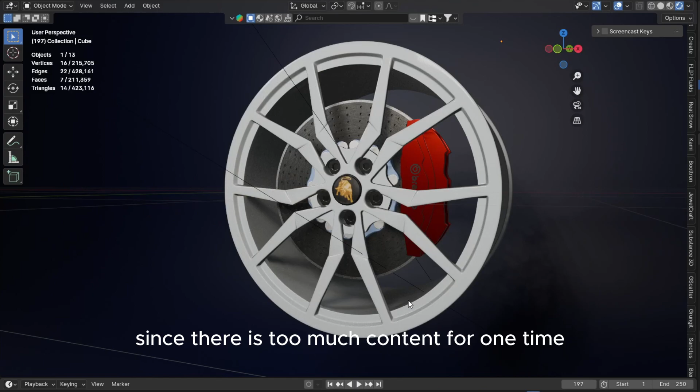As promised, here is the second part of the training on modeling a Lamborghini Huracan. In this part, we will have a wheel, but without rubber. That will be the next part, since there is too much content for one time. I hope you understand. So let's get started.

Let's start by deleting everything, then look for a reference, placing the view at an angle of 90 degrees by pressing 1 on the numpad. Add our image. It's important to place the reference as centered as possible, and at an angle of 90 degrees, since the final result depends on this.

So we add a circle mesh and set it in the settings to 100 vertices. Now we can rotate it 90 degrees, place it opposite the reference, and delete vertices, leaving 11 pieces from which we will start modeling.

We turn on modeling relative to the 3D cursor. We place our workpiece opposite the disc, and with simple movements we begin to create the shape of the disc.

Another thing I'd like to share is that you don't need to simply repeat what you see on the screen. I'll try to explain how it works, and then it will become clear why you need to do such manipulations with our model.

So what do we have? As everyone knows, there are 360 degrees in a circle. Our machine disc has 10 spokes that go in a circle. We take this as a basis and count. If you take these 100 vertices and divide them into 5 pairs of spokes, you get 20 vertices per pair.

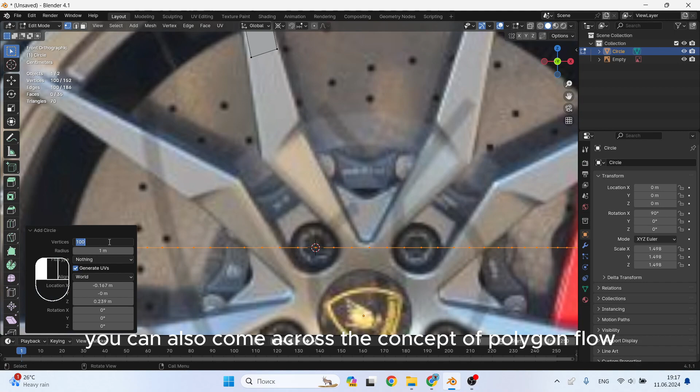You may also come across the concept of polygon flow, but the arrangement of vertices and edges of the mesh also plays an important role in creating 3D models.

There are no clear standards or iron rules in working with topology. This is an area where success can only be achieved through practice, analysis, experience, and being well read. In some ways, topology can be compared to learning a foreign language. You can come to another country without knowing its language, but you will definitely encounter problems and difficulties, and won't get the result from the trip that you could have if you knew the local language at least at a basic level.

What is the importance of topology? Basically, it depends on the task facing the artist. In hard surface modeling, good topology allows us to make edits and change the geometry of the model easier and faster, select individual areas, work with clean and neat chamfers, and get a clean final result.

In modeling characters or creatures, the mesh will deform during animation, so correct topology is important for clean animation. It makes the animator's life easier and allows easy, quick work on edits and changes to the model mesh. The cleaner and more correct the topology, the easier it is to control and predict the final result, avoid unpleasant artifacts, and save time by eliminating useless actions from the workflow.

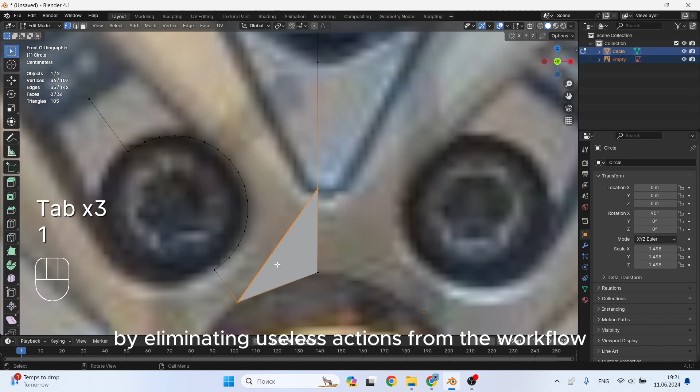What does a 3D model consist of? Any model consists of 3 elements: a polygon, an edge, a vertex. You will often hear these designations: vertex, edge, polygon.

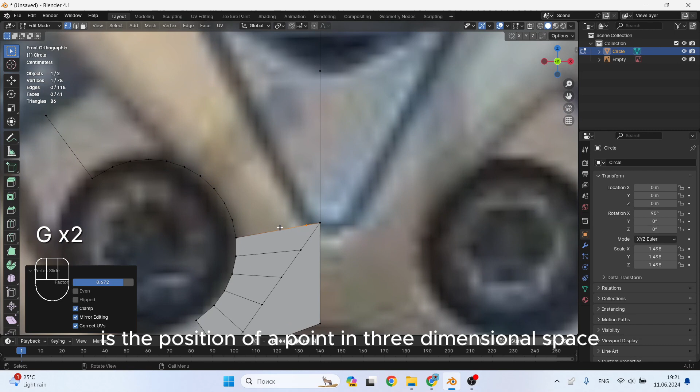A vertex is the position of a point in 3-dimensional space, determined by the coordinates x, y, z.

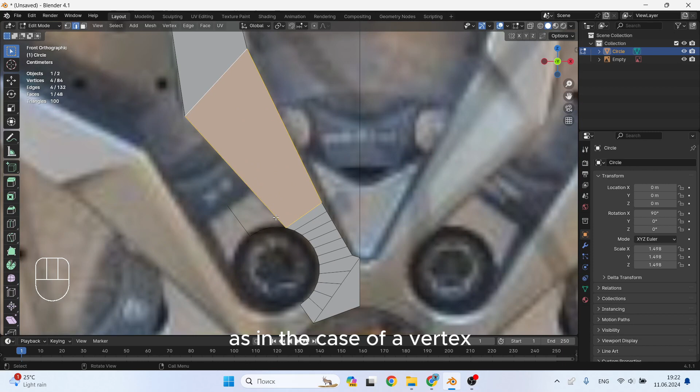It can store such information as color, normal direction, texture coordinates. Several edges and polygons can have one vertex. Edge is a line that connects two vertices. As in the case of a vertex, several polygons can have a common edge. It is important not to call them lines, and instead get used to the concept of edge.

Polygon: a polygon consists of three or more vertices with a closed contour of edges. This is exactly the shape that defines the surface of a three-dimensional mesh. Polygon flow, remember this concept. A polygon is also called a face, or a surface. Usually a 3D mesh contains from tens to hundreds and thousands of polygons.

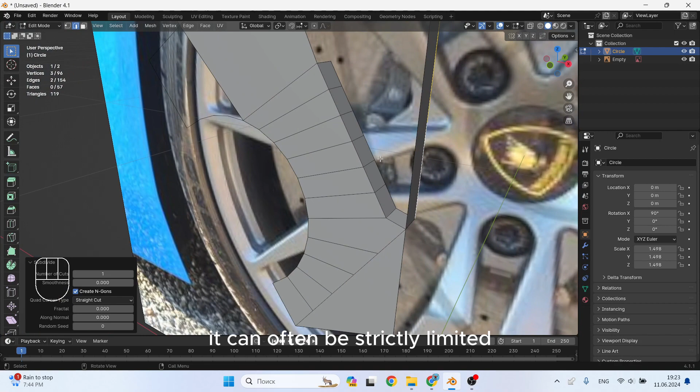It depends on the task for which we make our model. The well-known concept of optimization also includes the number of polygons, or more precisely triangles, included in the mesh. It can often be strictly limited by the requirements of the project, in the case of games. Every year these requirements become more and more blurred, thanks to the development of computing technologies. But this is not the only aspect of optimization.

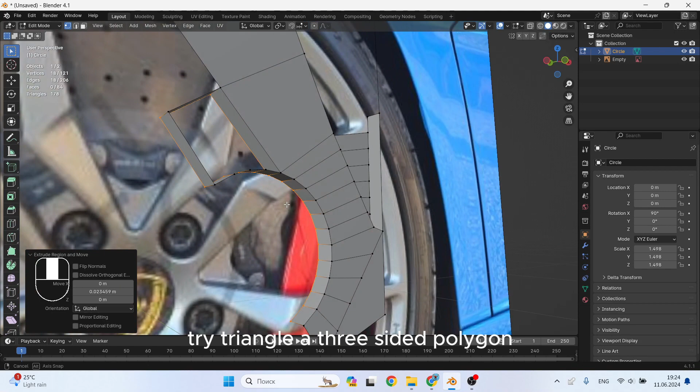Polygons are named based on their number of sides. Let's highlight three types that you will encounter most often. Triangle: a three-sided polygon. You will encounter this concept very often, since a triangle is the basic form of a polygon used, for example, by engines.

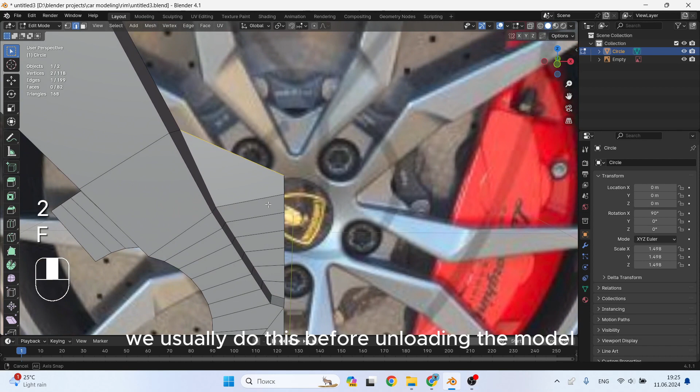There is also a triangulation process, dividing the quads of a model into triangles. We usually do this before unloading the model for baking. The engines, in turn, do the triangulation themselves if it is not done in advance.

Quadrangle, or quad: a polygon with four sides. This is the type of polygon that we should know, love and respect, since it is the basis of our model when creating its mesh.

N-gon: a polygon with more than four sides. Important: if you see a quad with 5 vertices, then this is already an n-gon, despite the fact that visually it is square. There are a number of opinions in the 3D community on the topic of using n-gon and triangle polygons in creating a model.

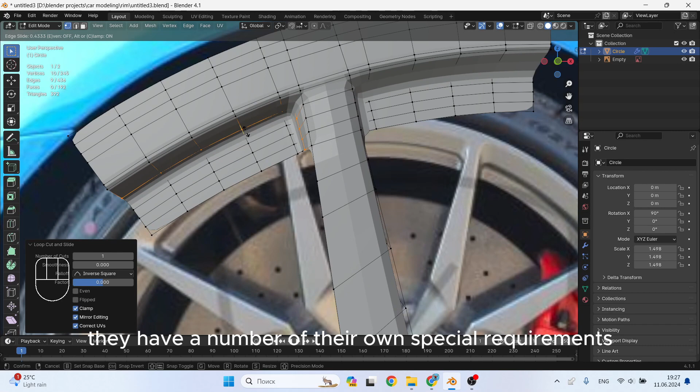In fact, everything depends on the situation and the goals for which the model is created. A separate topic is models for animation, for example characters. They have a number of their own special requirements for the use of polygons in topology. Let's take the following principle as a basis: what I can do does not mean that it should be so.

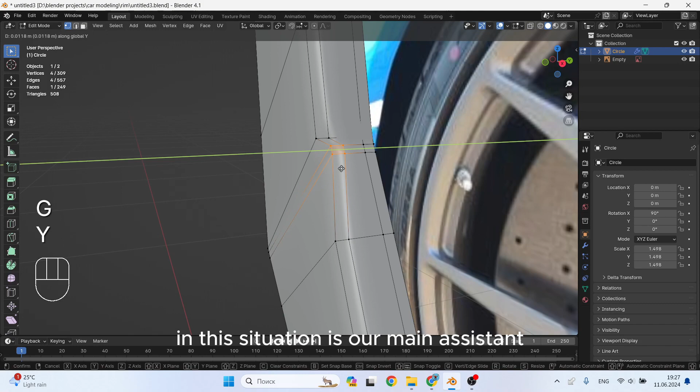We will strive to build our grids on quad, square polygons. Let's remember that an even and convenient grid is the key to ease and speed of editing. A square polygon in this situation is our main assistant. Of course there are situations when other types of polygons are used, but this is situational. It becomes clearer with experience, and on specific examples you will need to look and decide which polygon to use.

Planar and non-planar polygons, flat and non-planar. A polygon is planar if all its vertices lie in the same plane. Also, a triangular polygon is planar, since its 3 vertices will always lie in the same plane. Most polygons in your models will be planar, lying with their vertices in the same plane.

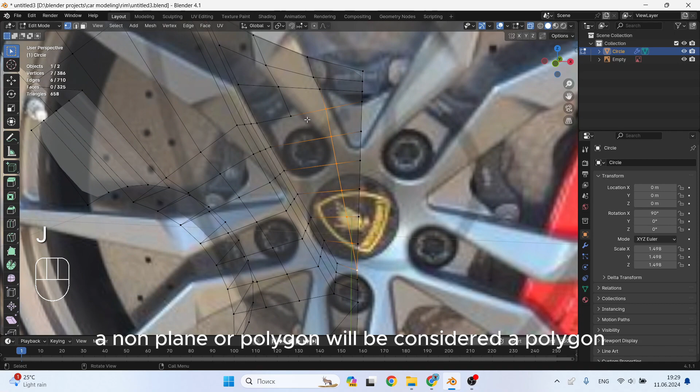In turn, a non-planar polygon is a polygon in which one or more vertices do not lie in the plane with the others, creating a bend.

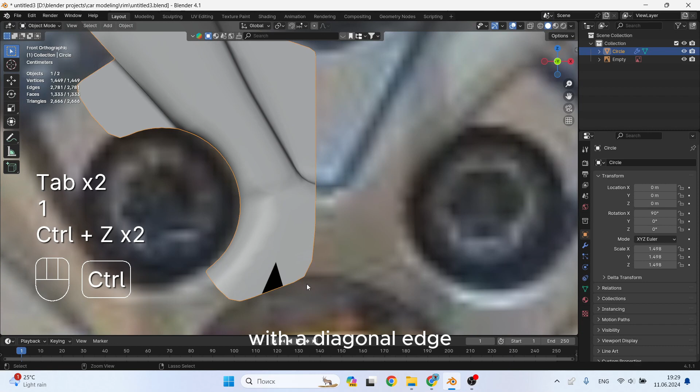When working with topology, it is worth remembering that there is a process of triangulation of models. We talked about it above. In essence, this is dividing your quads into triangles with a diagonal edge. Any engine requires that the model be triangulated for its correct display, or does it itself.

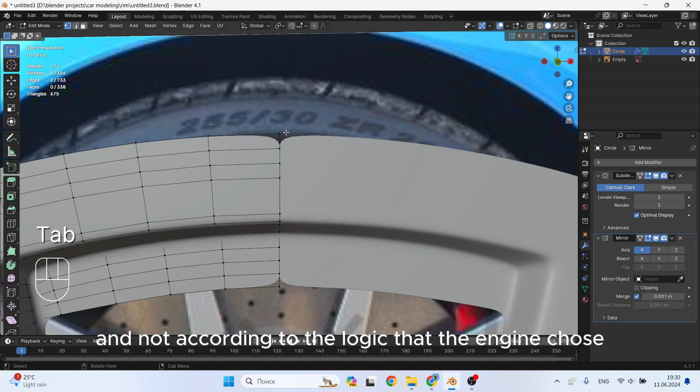In the case of non-planar polygons, this can create artifacts on the surface of the model, since triangulation on such polygons can lie arbitrarily, without taking into account their deformation axis. This is solved by manually editing the triangulation. It should go along the deformation axis of the polygon that you initially laid down when deforming it, and not according to the logic that the engine chose.

Subdivision surface is a surface subdivision algorithm that creates a smooth surface from a rough, polygonal mesh. When the mesh is subdivided, it becomes smoother, and its details take on a more final appearance. This transformation is reversible only if you do not apply final smoothing, for example before unloading high poly for baking.

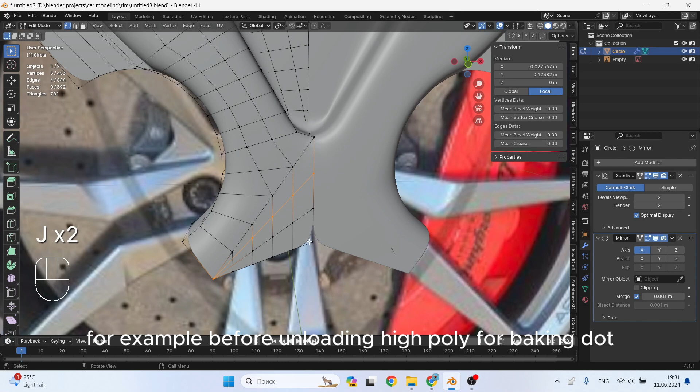The most commonly used subdivision surface algorithm is Catmull-Clark, or CC SubD. It was developed by Edwin Catmull and James Clark in 1978.

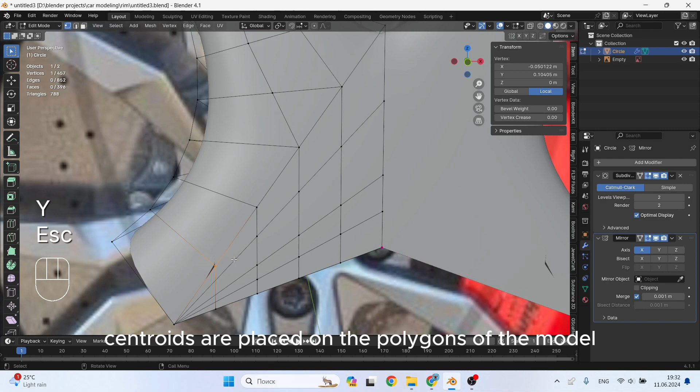Note how long ago a successful idea became a relevant tool to this day. In simple terms, its essence is that centroids are placed on the polygons of the model under sub D, vertices at the center points of the polygons. Then they are connected by edges, the remaining vertices are shifted to relieve stress, the shape is rounded.

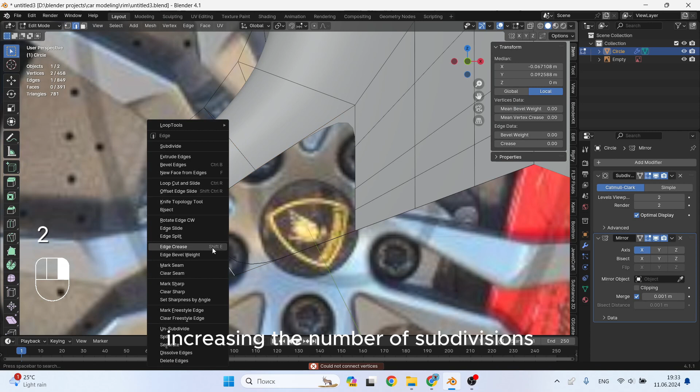This algorithm is iterative, that is, it can be repeated over and over, increasing the number of subdivisions. Thus, we get a high poly model, and it is this process that we need to take into account when building a model for sub D.

Clean and neat work with topology under subdivision surface is a guarantee that you will get the correct model without artifacts at the output: high density, chaos in the construction of the grid, inconsistency in polygons. All this can create a lot of difficulties for you in the modeling process and turn it into hard, exhausting work. But we want to enjoy the process and be creative, not rake up a pile of polygons, right?

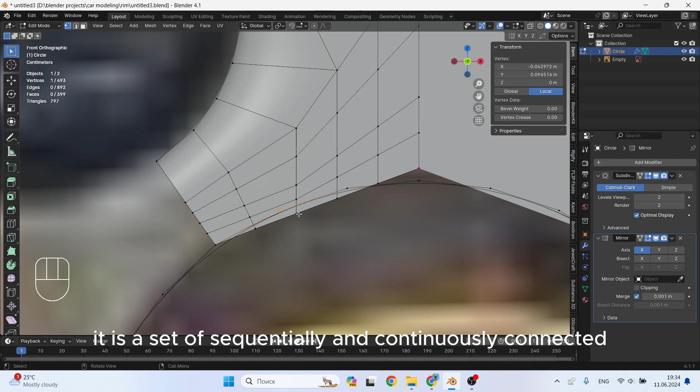Important definitions and concepts of topology that you need to know and take into account. Polyloop, a loop of polygons, is a set of sequentially and continuously connected square polygons.

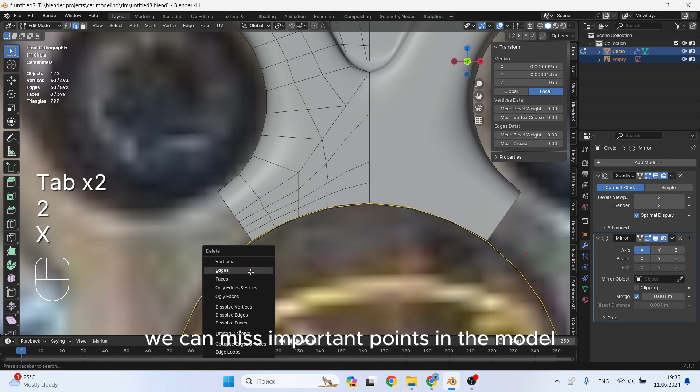Polyloop is an important element in building a 3D model. The ability to work with loops will be the key to your success. One polygon by itself means nothing, since thinking in this format we do not see codependencies, we can miss important points in the model, or make construction errors.

But a closed chain of polygons is a powerful tool that allows you to think and model more comprehensively. You should immediately, from the very beginning, try to think in loops, not separate polygons when creating your grids. Polyloop allows you to distribute polygons more accurately and evenly, select individual sections and edit the model.

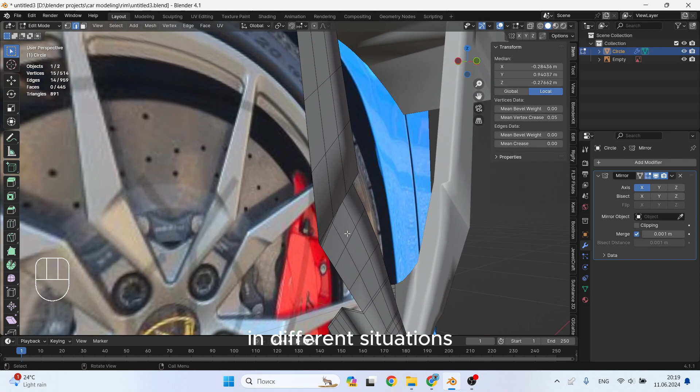When using sub D, correct polyloops are subdivided and smoothed best of all. This is why you should immediately, in advance, plan your work and try to think comprehensively. The right start to work is a guarantee that at the final stages you will save yourself a lot of time and effort. In different situations, polyloops work differently with sub D, which is why you need practice and experience to see and remember different situations.

Look at different examples of meshes, try to see these loops, and soon you will understand that indeed, each model consists primarily of them. Edge loop, in turn, is a loop of edges.

As with polyloop, an edge loop is a cut that you will make on the model, and they will close. Correct work with the placement of such loops is also the key to a clean, light mesh that will be correctly smoothed and easy to edit.

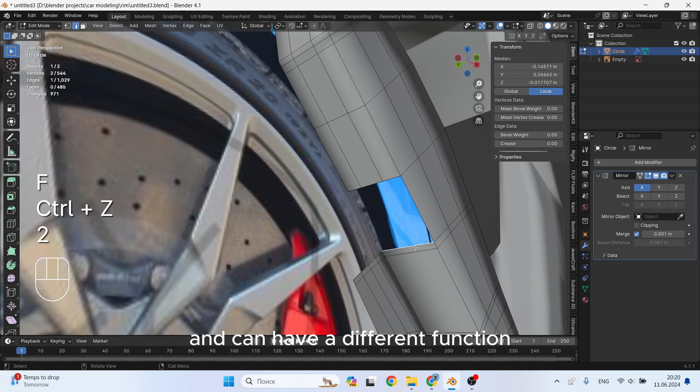Pay attention to the image above, it shows both polygon loops and edge loops. In fact, these are inseparable concepts, but each of them is important in itself and can have a different function depending on the task. There are also situations when the edge loop ends in a star, they are also called poles. We will talk about this further.

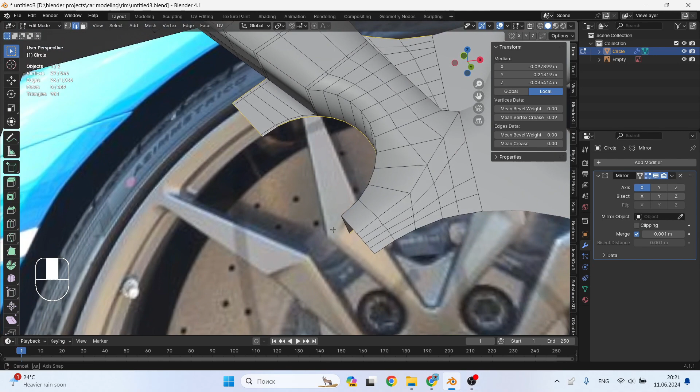Each edge loop is designed to serve the shape of your object. Look at the position of the loops in your model and tell yourself which of them serve a function and which do not. This will show you where you have done unnecessary work. When working with edge loop, it is also worth thinking in loops, not individual edges.

Well, at this point we can consider that our part is ready, so we need to start reproducing it. It's not difficult, but for this we need to remember the geometry material for the 5th grade.

If we divide 360 degrees of a circle into 5 pairs of spokes, we will get 72 degrees occupied by one spoke. That is, we need to copy our part and rotate it relative to the 3D point by 72 degrees. And if you connect 2 parts, then in order to move them, you will need to rotate them by 144 degrees.

Well, and one more detail. When ready, you can connect them, and add the Weld modifier. As you can see, not everything is perfectly connected, so you need to fix it a little using the M button to merge them. To avoid this kind of problem, you need to create the first part ideally, so we strive for the ideal shape.

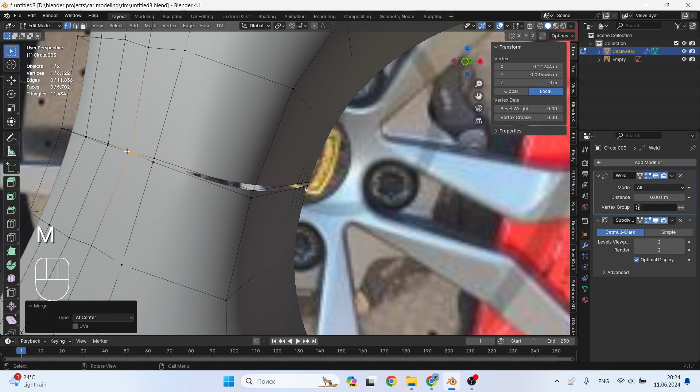At this point we need to select all and make it by distance merge. We need this to make correct geometry.

Also go to Loop Tools and apply Circle to these edges one by one.

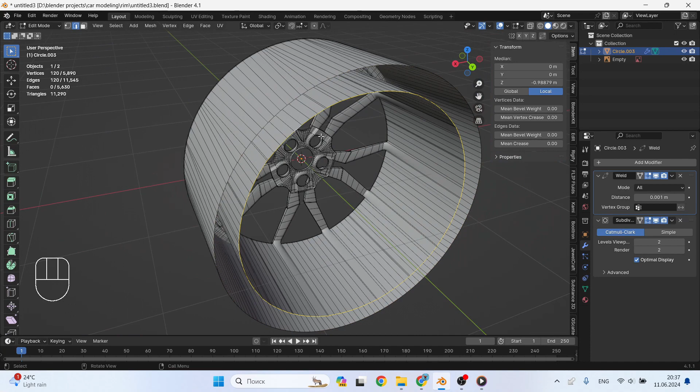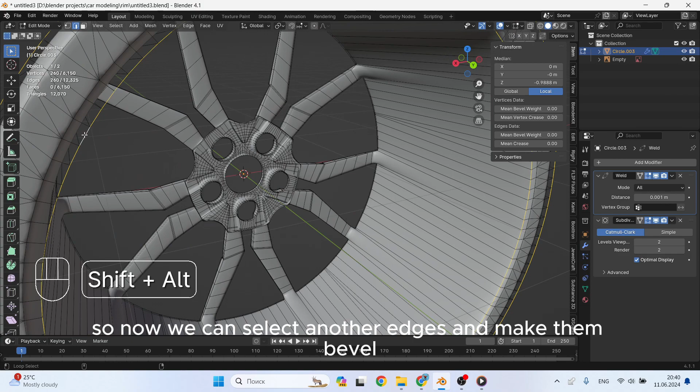So now we can select these two edge loops and make a bridge among them. And immediately, without cancelling the selection, compress the edges using the letter S. Okay, we're good. Now we can select another edges and make them bevel, but first we need to dissolve a few edges we don't need.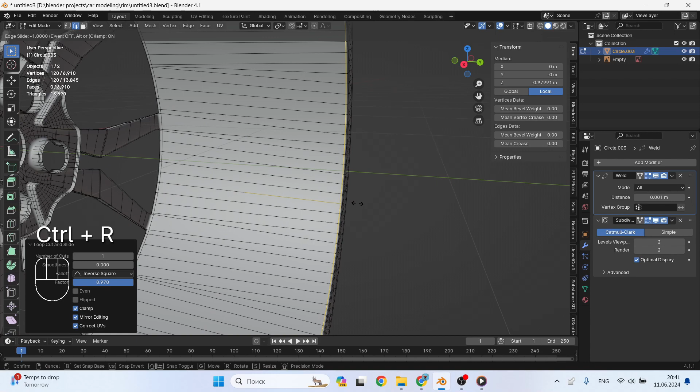And we need to make place for a tire. So we need to give another cut here, so press Ctrl R, decrease amount to 1 and use Alt E to extrude along normals.

Also let's give another bevel to these two inner edges to make them sharper.

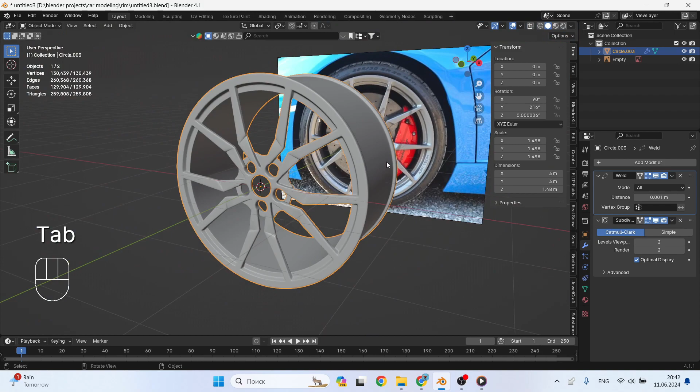Okay, now our model looks more like a wheel disc. So now we need to finish with these elements. This is the hole for the bolts and the central part of the disc. They should be wider.

To connect circles you better use grid fill, then simple F button, it gives better topology.

So ladies and gentlemen, lovers of spending time in Blender, we are doing very well. I would say that we have passed the most difficult part. Now everything will go more pleasantly.

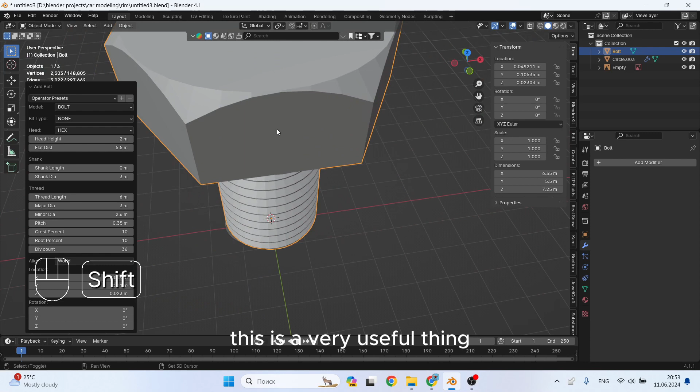I suggest adding bolts. To do this, you must have the Bolt Factory add-on enabled. That's what it's called. This is a very useful thing. It has both bolts and nuts of different sizes and types. Here you can choose what we need.

I know that cars are equipped with bolts with secrets so that they cannot be unscrewed without the right key. Let's choose something similar.

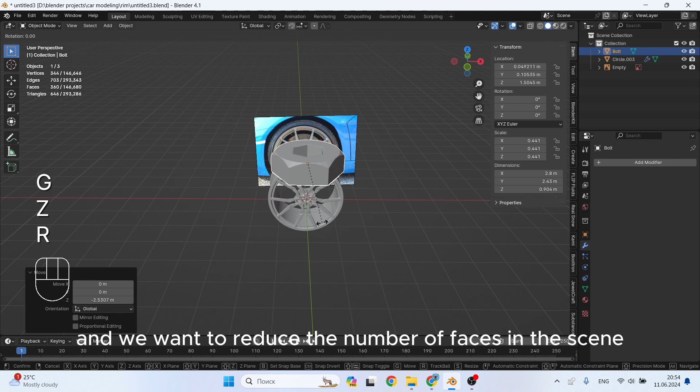And we don't need the part with the thread because it won't be visible, and we want to reduce the number of faces in the scene, so we delete it. Now we can adjust it to size, turn it over and install it in place.

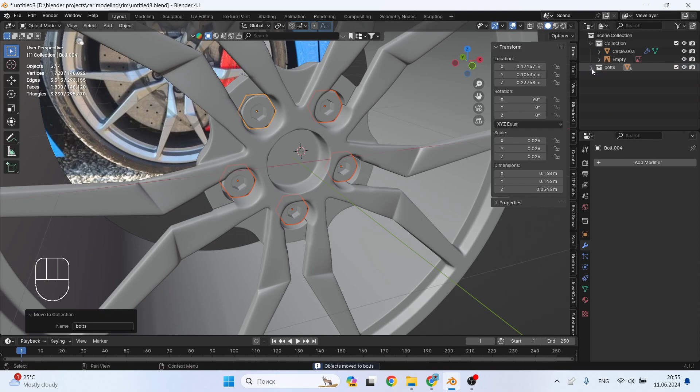So we move on to the brake disc.

We add a circle mesh and immediately in the menu on the bottom left we set the number of vertices to 200, well, or quite a lot, because we will need to make screw holes and this requires a large number of vertices, so we additionally subdivide our disc also across, at least 10 times.

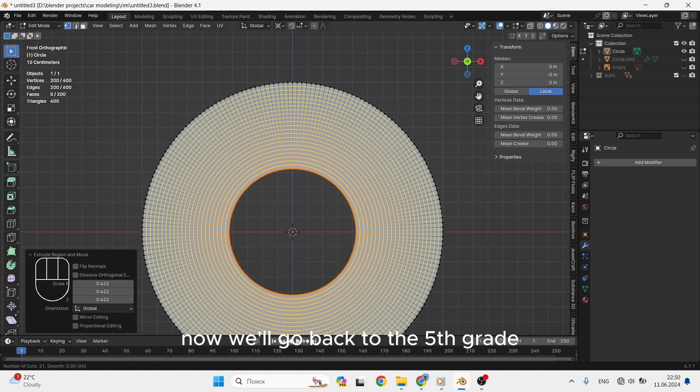Now we'll go back to the 5th grade and remember our geometry lessons. I suggest we conduct a small survey, press pause, and who remembers the name of their math teacher? Write in the comments so I'll at least understand that you're listening to me. I'm trying for all of us, ha ha ha.

Okay, let's get back to business. We delete the lower part, the right part, and half of what remains.

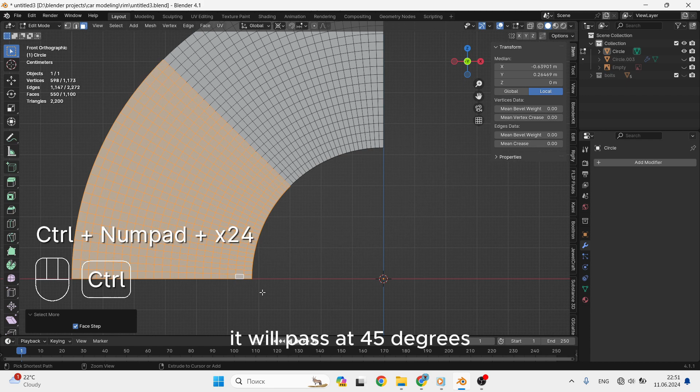If we draw a bisector it will pass at 45 degrees, for this you can use the stage grid. Or take a cube, connect the opposite vertices diagonally, delete half and get a right triangle whose long side will be at an angle of 45 degrees.

In general, using the Alt button, select the faces, using Ctrl and plus, add a selection and delete half. Now you need to select the faces to which we will apply the loop tool and make ventilation holes. I will speed up this process a little if you do not mind.

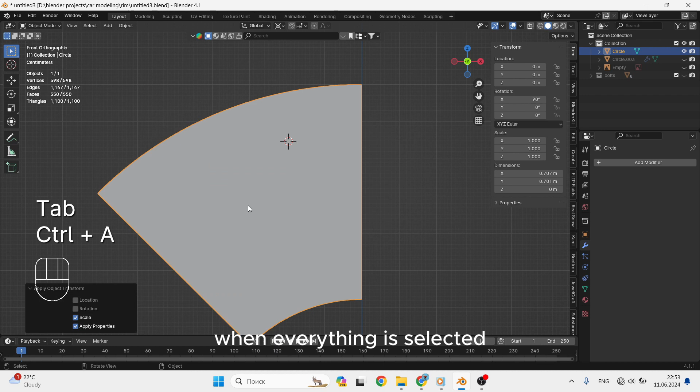When everything is selected, press Inset, you can do it twice for a stronger structure.

Set the thickness, select everything and extrude along the Y-axis. Here you need to delete the side faces as they are not needed and will even interfere in the places where the objects are connected. So delete them right away.

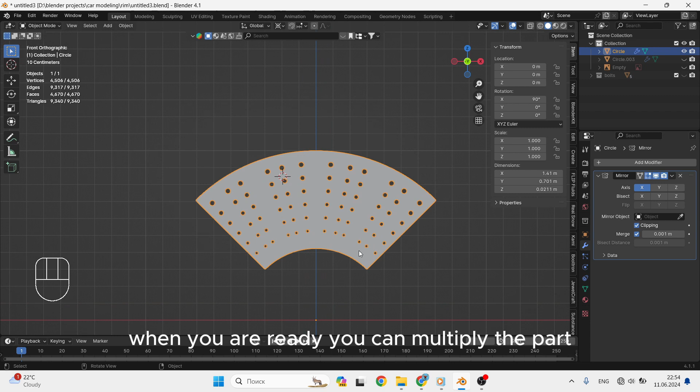When you are ready, you can multiply the part. First, use the mirror modifier. And then turn on the transformation relative to the 3D cursor and, as we did earlier, copy and rotate only by 90 degrees. Bam, and the part is ready, everything is fine with us.

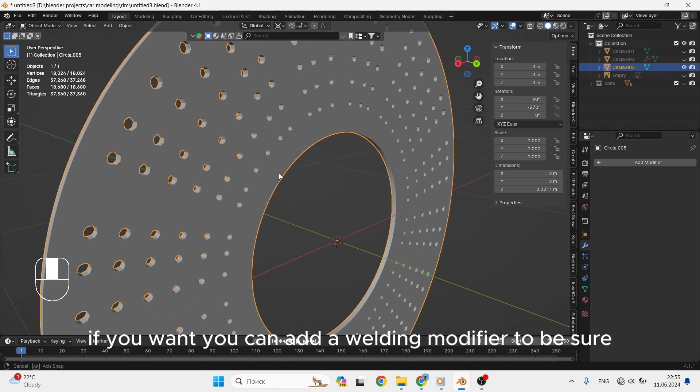If you want, you can add a welding modifier to be sure. Now you can install the brake disc calmly.

So now you can move on to the decorative thing in the form of a chain. To do this, create one link and multiply it.

Add the almighty cube, subdivide it into parts, give it the desired shape. In the process, give it a bevel modifier.

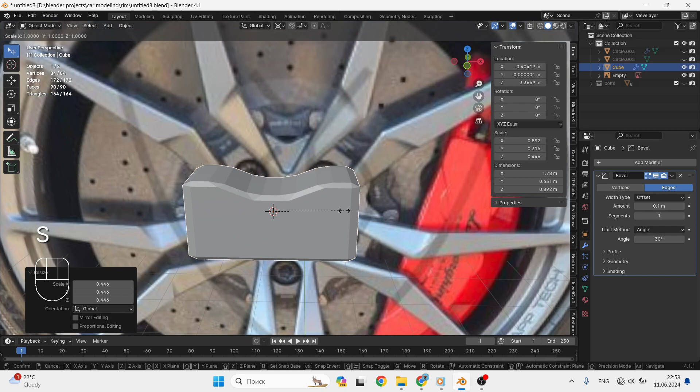Add a cylinder, give it a mirror and bevel modifier. Now you can connect all this.

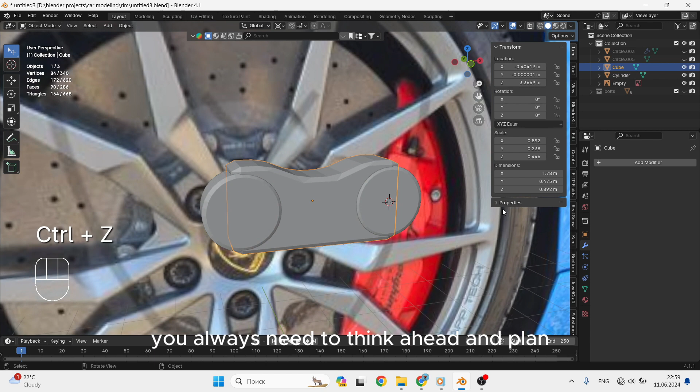You always need to think ahead and plan, so here I will immediately paint this piece of the chain, so that you don't have to do this for each object.

Well, in order to run this piece of the chain in a circle, we add an array modifier and a curve to it.

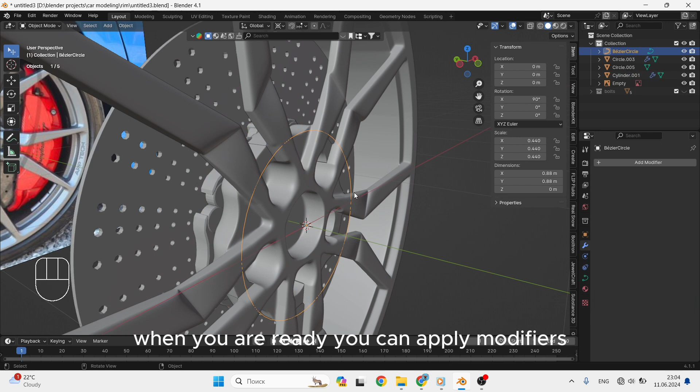Well, the next element can be mounted in place. When you are ready, you can apply modifiers so that the chain is ready as one mesh.

So, let's move on to shading. We need to paint the brake disc and make circular marks from the brake pads. For this we need to add a new material and set the BSDF metallic to 1 in the principled shader, then add color ramp, noise texture and texture coordinates.

Connect the factor to the factor, color to color and object to vector. Since the Musgrave texture was removed in update 4.1, we will use the noise texture instead.

Copy the color ramp and swap the black and white sliders. Do not forget to uncheck the normalize box. And use the settings as on the screen.

Then add a color mix and mix these two textures. At this point, it's ready, you can always adjust it if necessary.

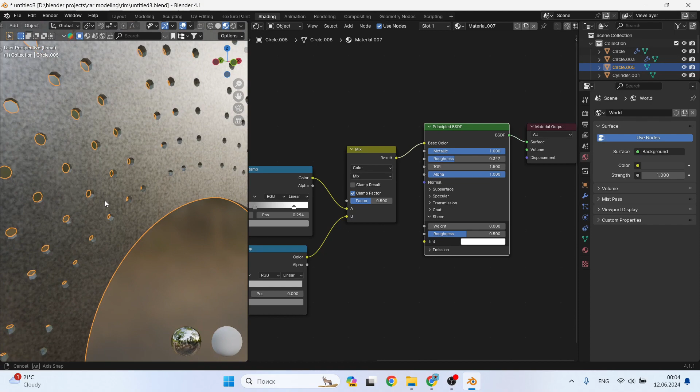Let's move on to the second material. Add another one by clicking on the plus sign.

Add 2 color ramps, make color settings as on the screen, add a noise texture, color mix, gradient texture, texture coordinates, and do not forget to switch to spherical in the gradient texture.

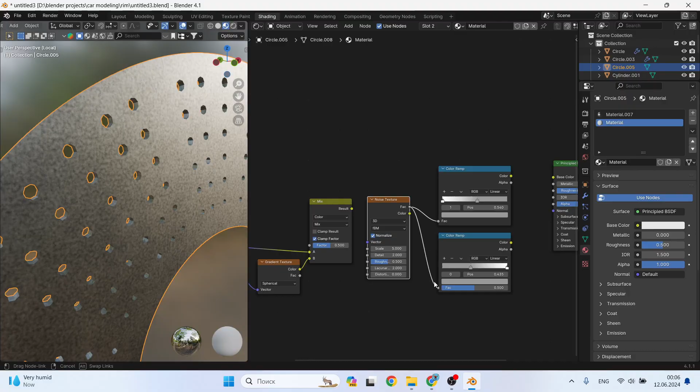To visualize what is happening, you need to select those faces to which this material will be applied, traces of brake pads.

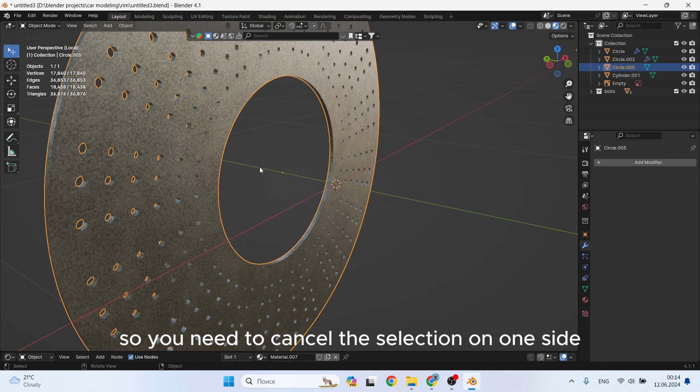As you can see, I use a combination of Ctrl and plus to select, and it selects from both sides, so you need to cancel the selection on one side that will not be visible. Of course, it is not critical, but we strive to ensure that everything is correct.

And we apply the second material. We connect everything and when we set the scale to 1200 we can see the result.

We connect the second color ramp to roughness and bump to normal. We set the bump to a very small value and add metallicity.

And now you can correct the color and roughness.

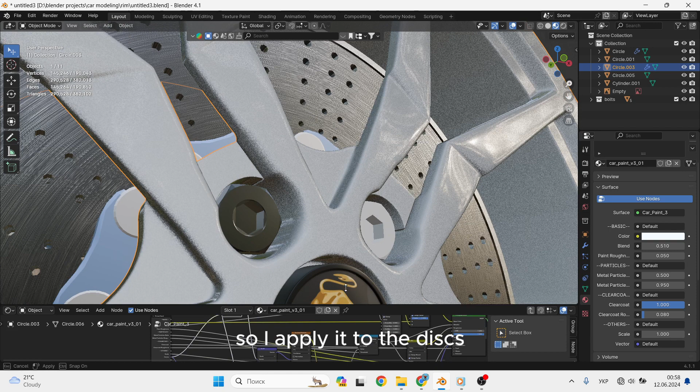I'll go over the disk material quickly. I downloaded a library of assets and this car paint was there, so I apply it to the disks. I like the metal particles inside the paint.

I'll show you the node system. You can use print screen to take a photo. I advise you to create a library of materials or assets that you use.

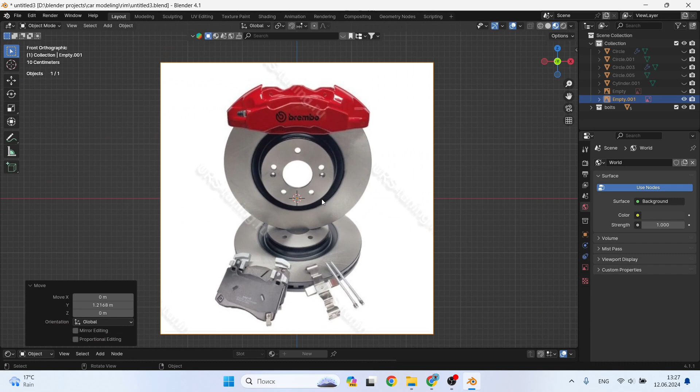Well, let's move on to the brakes. There's nothing out of the ordinary here. Add a pre-prepared reference, add a plane, rotate it, subdivide it and delete the left side.

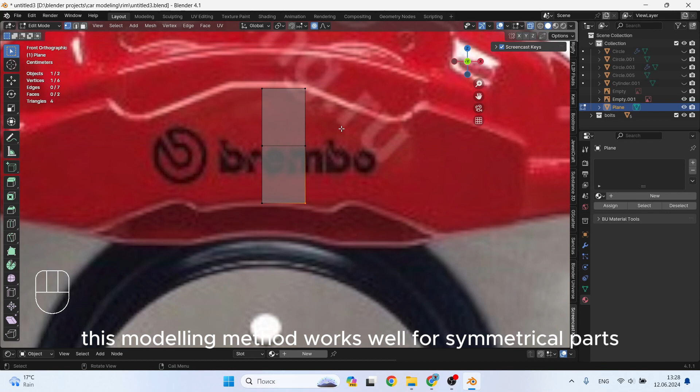This modeling method works well for symmetrical parts. It saves us time. And using the reference as an example, create a shape.

After what we did with the disc at the beginning, this is an easy walk for us, but it needs to be done.

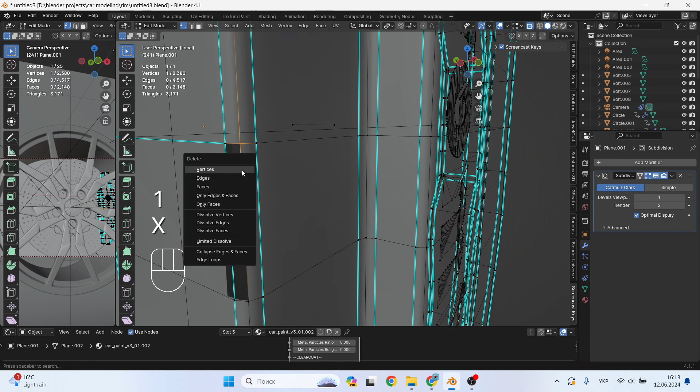In order to place the Brembo logo, I downloaded it from the internet.

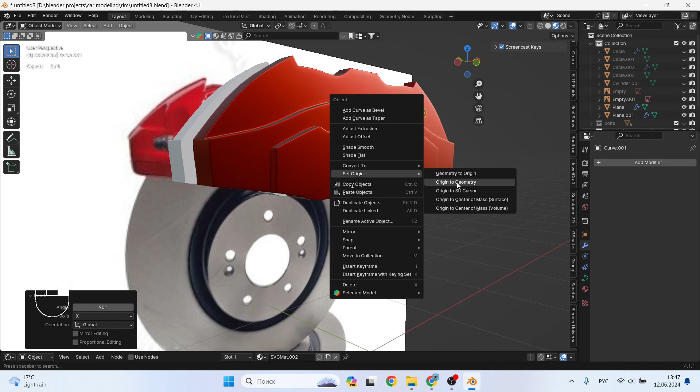I came across a vector version, so I'll just add depth to the letters and attach them to the brake housing using Ctrl+P, setting the parent.

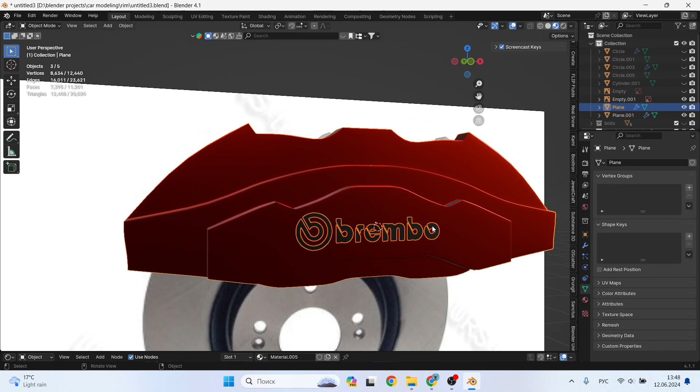Well, duplicate the housing and rotate it since there should be two brake pads. And so the part can be installed in place.

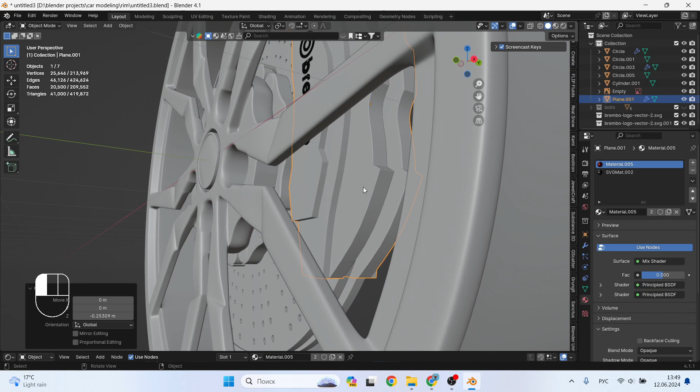A very useful combination is Ctrl-L. I recommend you to read about it boldly. There are many interesting variations of what exactly you can copy.

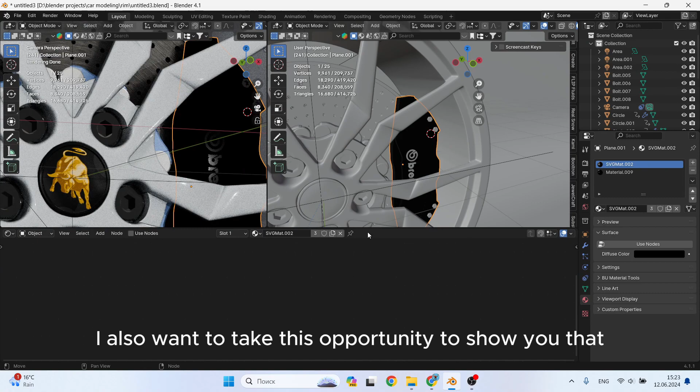I also want to take this opportunity to show you that the paint that I used for the disc can also be used for the brakes.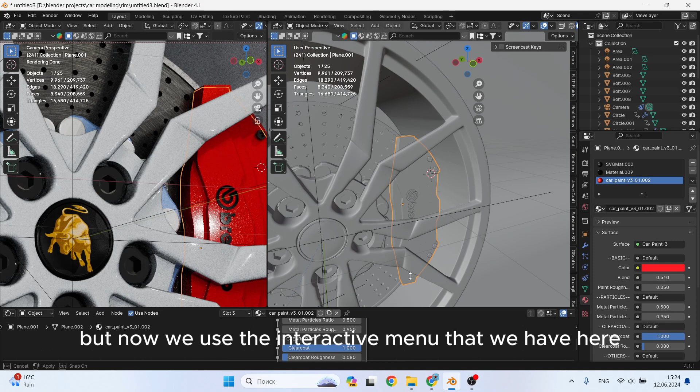But now we use the interactive menu that we have. Here there is very good access to the settings. As you can see, I removed the metal shavings from the paint impurities.

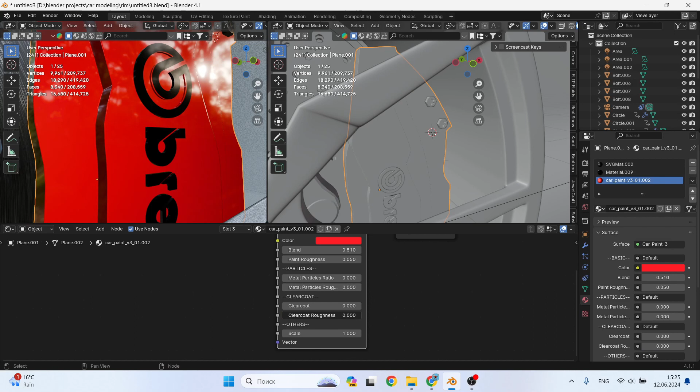And so our lesson is coming to an end. In the next one I will most likely make a tire.